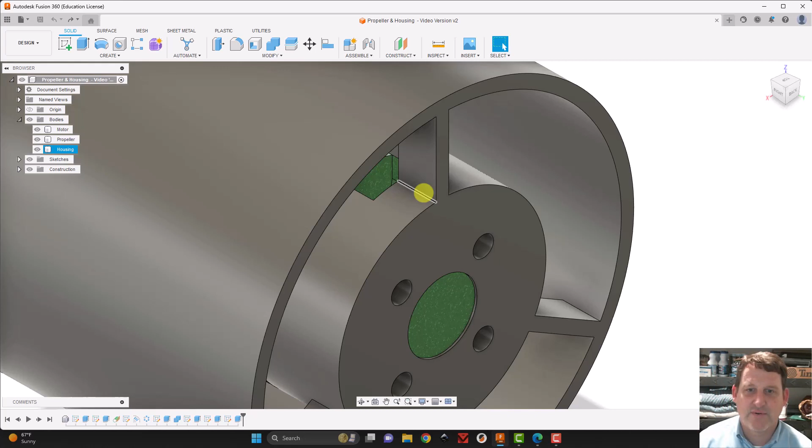We're also going to add a little foot to the top here so we can connect it to other things like a servo motor or the thruster test rig. So those are the three main things we want to accomplish. Let's get to it.

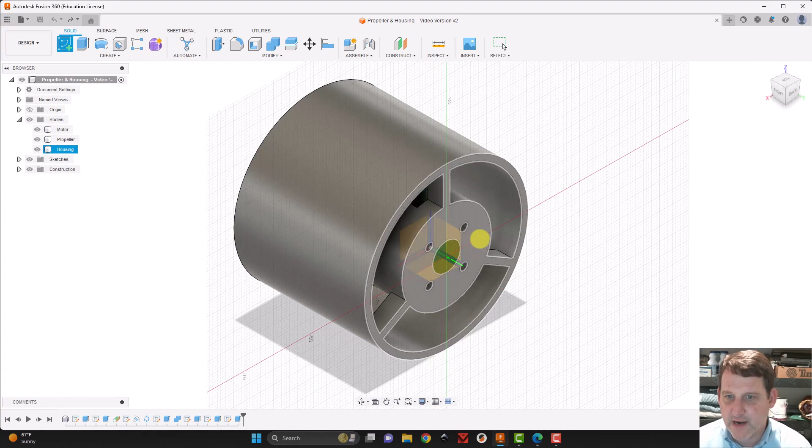I'm going to grab my new sketch and put it on the bottom. I want to avoid all these planes down here and put it right on the bottom of the actual mount or housing. Then I'll do C for circle and start the circle in the middle of one of these holes and go out to 6 millimeters. The head of these screws are 5.5 millimeters, so 6 will give them a little bit of clearance.

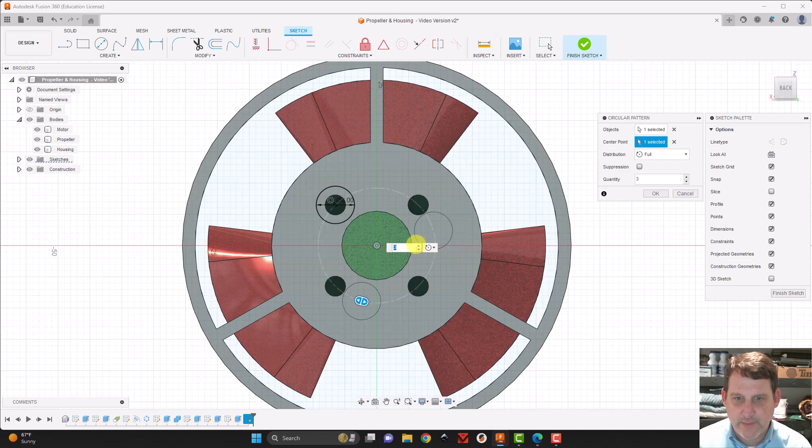I could just go ahead and make 3 more, but I'm going to do a circular pattern instead. I'm going to pattern this circle around the center of this main circle, and I want 4 of them. Click OK, and I'm extruding already.

So, E for extrude. I'm going to click on all 4 of these donuts that I want to cut out. I don't really know how far to cut. I want them to be about 2 millimeters from the inside surface, but I don't know how far that is.

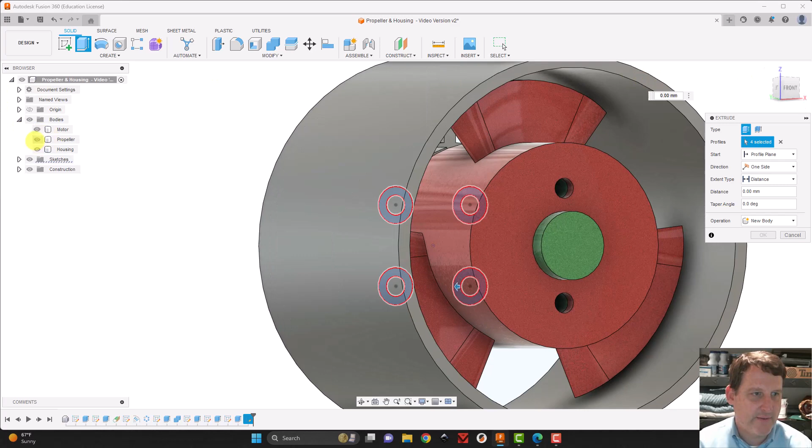So a neat trick you can do is turn off the motor and the propeller so I can see what I'm doing. I'm going to tell it instead to cut to an object, all the way through to this face. Then I'll switch the 'to object' setting back to distance, and it will show me how long that is. In this case, it was an easy 6 millimeters, but sometimes it's a really weird number.

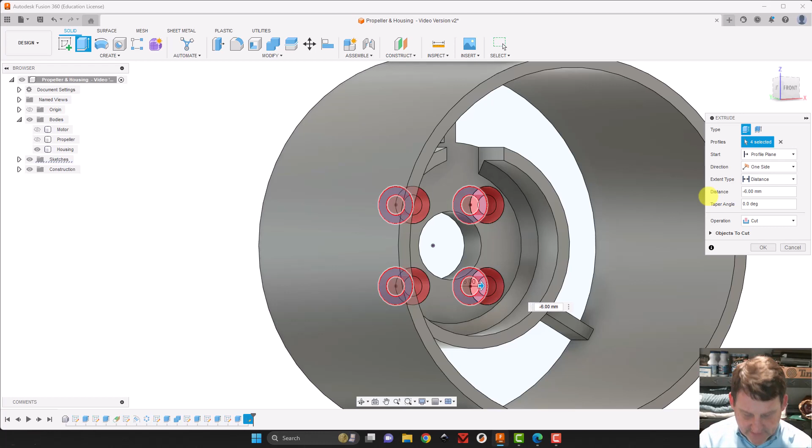Now I want it to be 2 millimeters short of this, so instead of 6, I'm going to type in 4, and say OK. You can see now we've cut recesses so the screw heads can go in, and the screw can embed really far before it grabs the motor. Awesome, so that's all done.

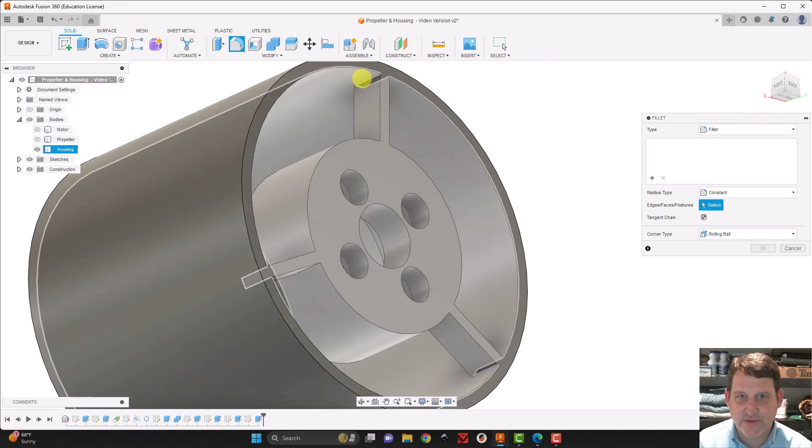Now we just need to round over all these hard edges. I'm going to grab the fillet tool and adjust it so I can see as many edges as possible. I see an edge up here and one down here. I'm going to flip it. I can see one here, and maybe this one too—yep, got that one too.

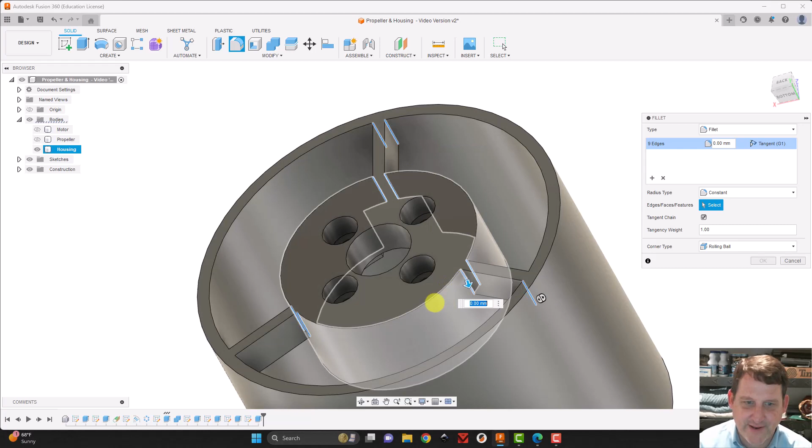I'm going to come over here. Okay, I can see this edge and this edge. I'm going to flip it. I think I can see all 3 of these edges—one here, and one here. So far I've got 9 edges. I'm missing these bottom ones—that one there, that one, and one more.

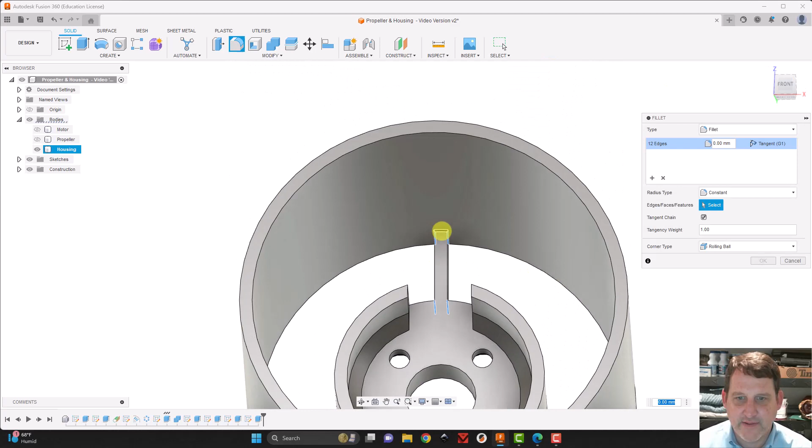That's 12. Now those are the main edges we want to hit for strength, but we're also going to flip it over, look at the front, and add these outside edges as well that hit the housing. If you get lost in your rotation, hit the home button and you can start rotating again cleanly. Sometimes the view cube gets in a weird space and I just can't use it well, so I hit home to get back. Then I'm going to zoom in here and get these inside flats as well.

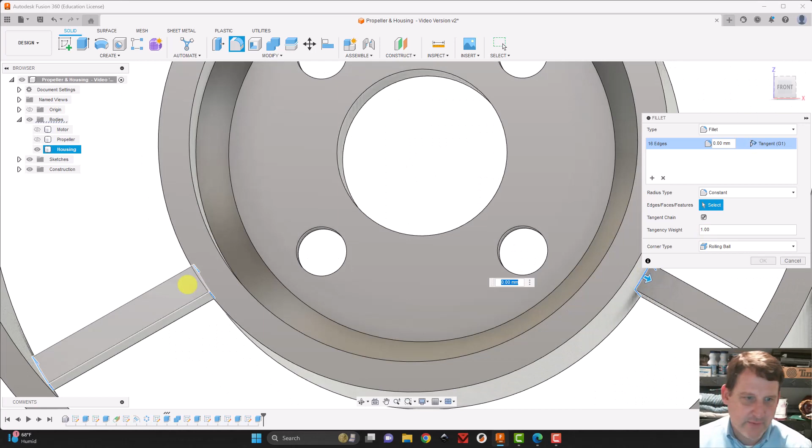When you're all said and done, you should have 17 edges. The reason you have 17 is you didn't need this one last 18th edge here, because it's a flat surface there. All right, now I'm going to give it, let's say, a 2 millimeter round over to see what it looks like.

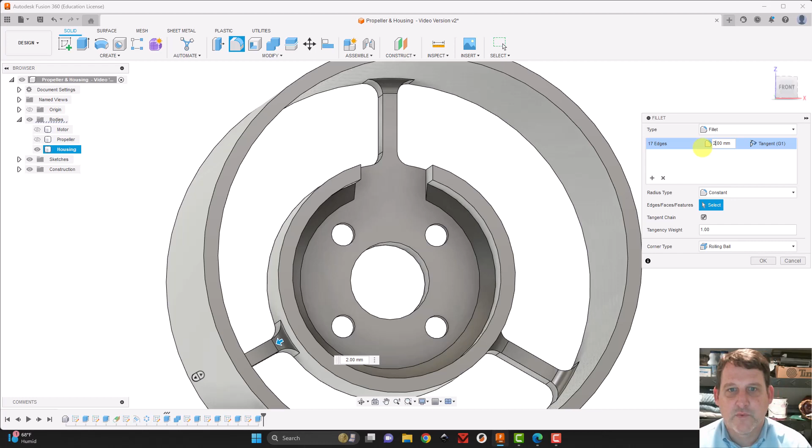Okay, that's a lot, so maybe we can do 1 instead. There we go, that looks great. 1 millimeter round over looks fantastic. Now you can see what we've done, we've got this really nice professional looking weld here in the corner. It's going to make it a lot stronger as we go about our things. Awesome, I'm going to do A for appearance.

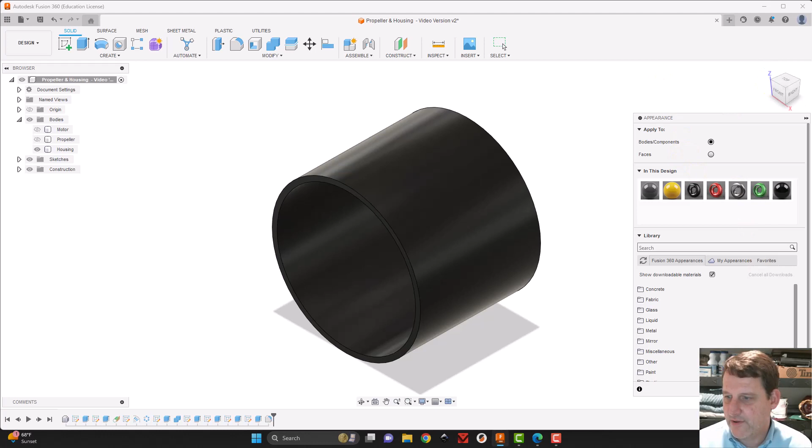I'm going to add some color because I like that. I'm going to grab this glossy black. Ooh, I like that, okay that looks good. And close this out, and then I'm going to turn the motor and the propeller back on. Everything looks fantastic.

Okay, so the last thing we want to do now is add that foot to the top of it. So I'm going to create a sketch real quick. I'm going to try and create a sketch, but I can't. There's no way to do a sketch on a round surface like this.

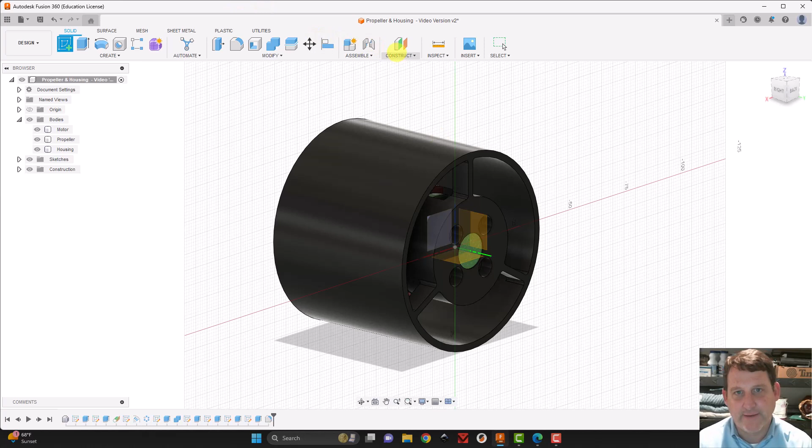So what we need to do first is create something flat that we can put the sketch on. And when we need something flat, we use what's called a construction plane. So I'm going to come up here to my construction plane. There's lots of different kinds of construction planes. The one we want is called a tangent plane. What tangent means is that there's something like a line or some object that barely touches the outside of a curve.

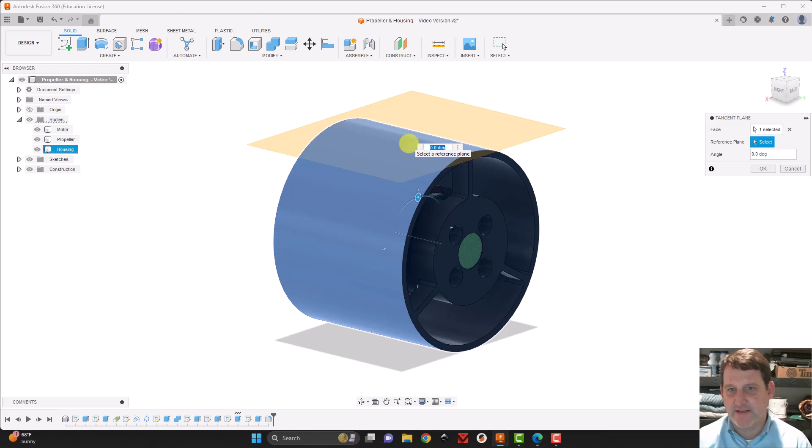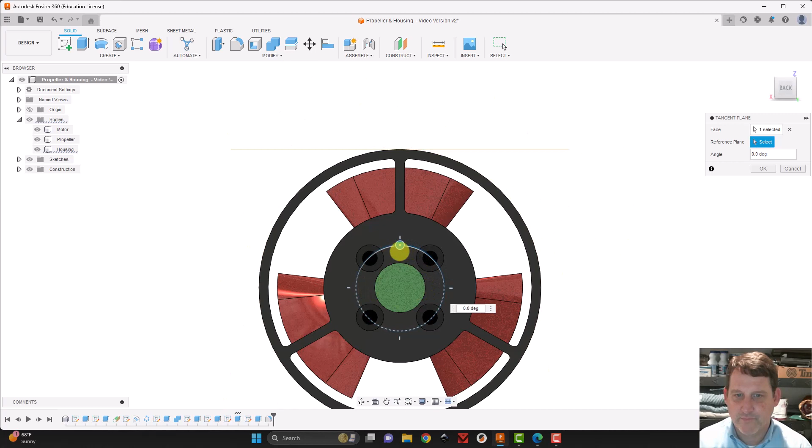So it's going to ask me what face I want to be tangent to, and I'm going to go right here to this face. Click on that outside edge, and all of a sudden I can put it there. If I go from the back, you can see it creates a plane that just barely touches the top of the circle. Now if I wanted to, I could grab this circle, this little dial, and put it on any side I wanted to. But I'm going to leave it here right at the top and say okay. Now I've got something flat I can put my sketch on.

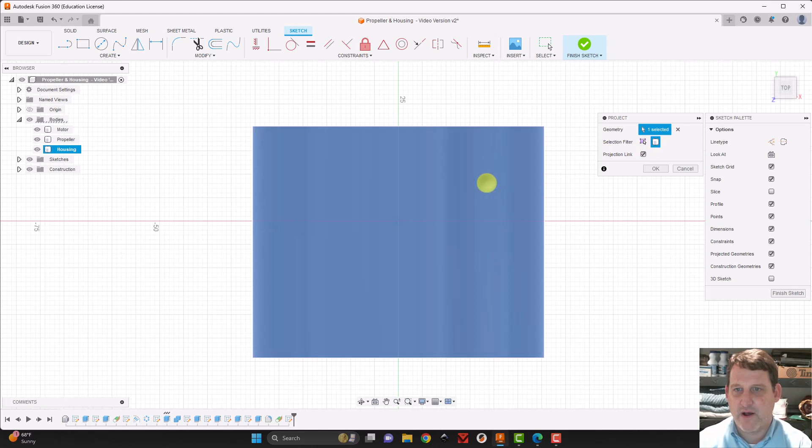So I'm going to grab my sketch and put it right on top here. All right, I'm going to project the shape of my overall body. So I want to be away from just the entities, and I want the entire body. I'm going to click on the housing and say okay. And now I can hide everything, and that's the shape of my housing.

Next thing I want to do is create a 45 millimeter circle somewhere in the middle. I do not want to place it somewhere special, like locked in the middle—I want it to be where I can move it all around like this. I'm just going to drag it in here inside somewhere. And I'm going to use the tangent tool.

Well, actually, before I do that, let's create a point. We're going to need to know where this center point is. So I'm going to scrape across this top purple line until I see that triangle, meaning midpoint, and click to add a dot there. I'm going to take my circle and make it coincident, so I'm going to grab the coincident tool and make the circle coincident. What that means is the two of them touch each other.

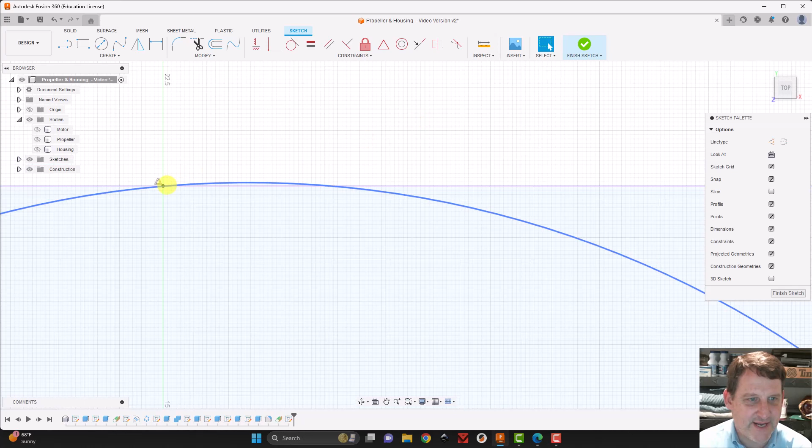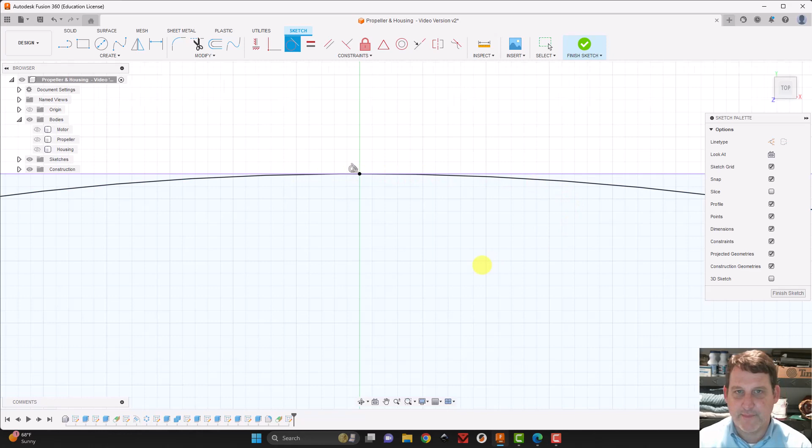Now, if you notice, it's hard to see how it touches this dot, but it also goes above this purple line. We don't want that. So we need one more constraint to get it to work just right, and that is a tangent tool. I'm going to grab the tangent tool, click on the circle, click on the top line, and now the circle doesn't pass through the purple line—it just comes up and barely touches it right there, then curves away from it. That's what tangent means. Awesome, and at this point the circle should be black instead of blue, meaning it's fully constrained and in place.

Next thing I want to do is just grab a line. I'm going to drag it from the circle to this top purple one. It doesn't matter where I start on the circle because I'm going to fix that in just a second, but I do want to keep moving around until I see that right angle 90-degree square show up, so I know I'm perpendicular. If you've done it right, you'll get these two T symbols, which means it's perpendicular. This blue line's perpendicular, 90 degrees to the purple line.

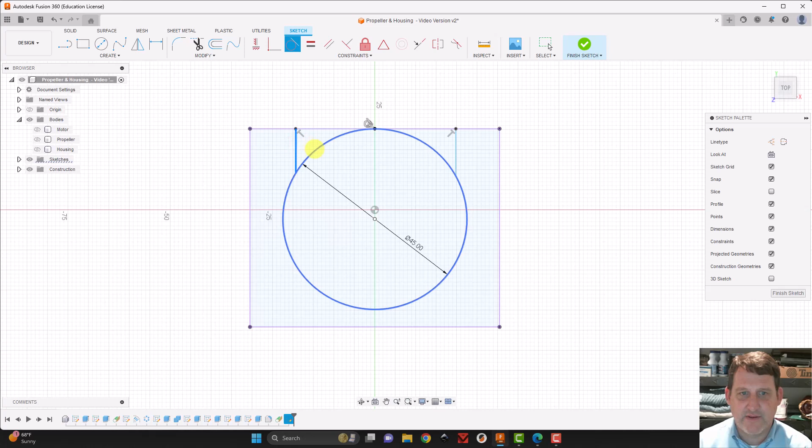All right, now what I want to do is have these lines come off really cleanly and smooth. Like they come down here and there's a kink right here. So again, I'm going to use tangent—click on this line and then the circle. That's going to force it to be tangent, so now it comes perfectly smooth off this circle. Same thing on this side.

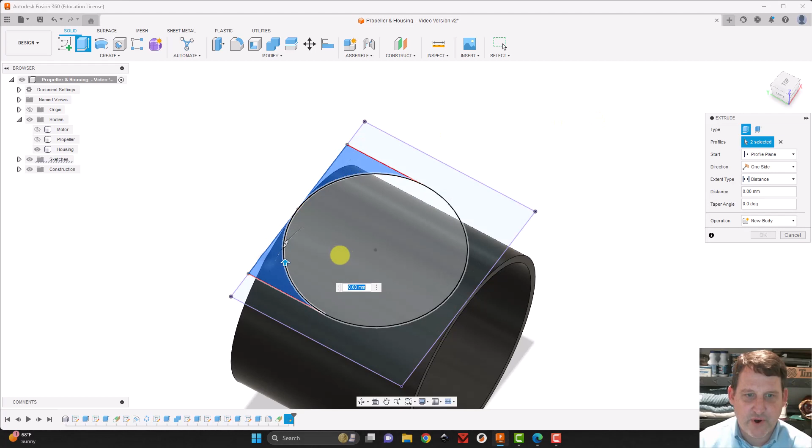All right, now I'm going to turn the housing back on, and I'm going to extrude this. E for extrude. I'm going to choose all of these pieces. This is going to be that foot that we're going to be able to screw into and attach the servo motor or whatever we want to it.

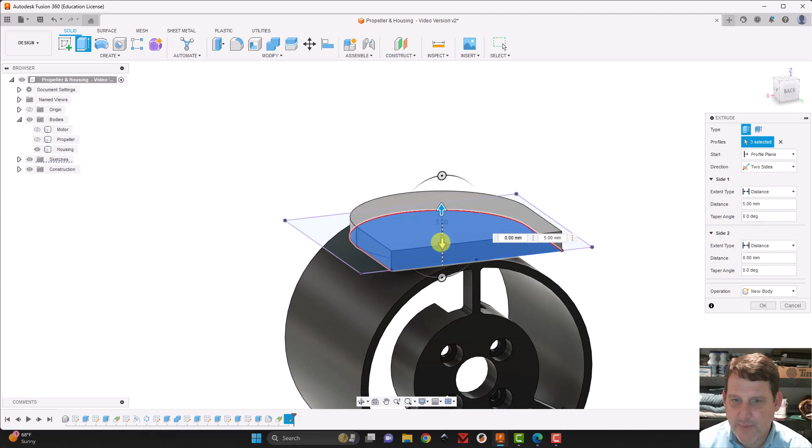I'm going to actually do a two-sided extrusion. I'm going to flip it over, and on the top half of the extrusion, this half, I'm going to bring it up 5 millimeters. And then on the bottom half of the extrusion, I'm going to say to object, and then click on the outside surface of the housing.

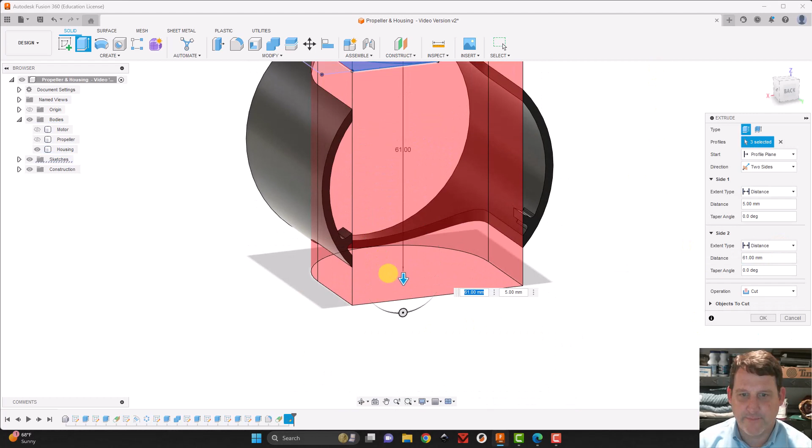What that does is it projects it down, extrudes it down in a wrapping way to barely touch that whole housing. If instead I were just to try to grab it and pull it through a distance, oof, that's a nightmare. I would have to go through a cut here. If I were to just try and pull it down to where this corner matches, you can see what it's doing is it's actually extruding into the whole thing. I don't want to do that.

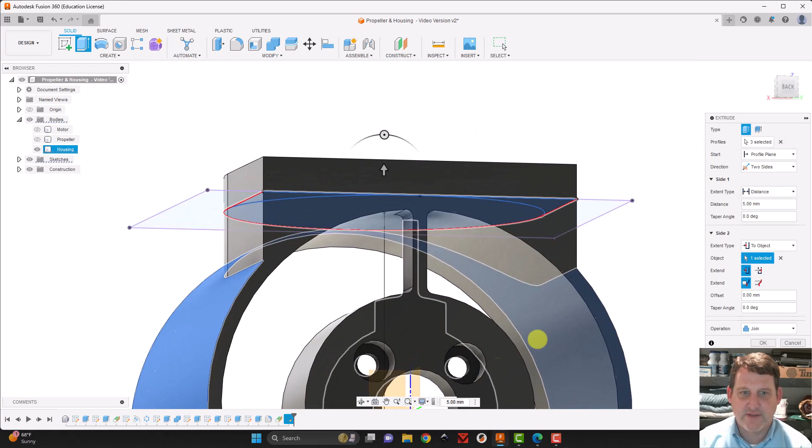I want to do it to object and then just click on this object. And now it extrudes just beautifully. You can see how it just beautifully extrudes to the right shape to get there. And then I'm going to click OK. Now I've got my little foot that I can put on stuff.

Awesome. Next thing I want to do is I want to cut. Well, let's hold off on that actually because I'm not sure how big the hole, where the hole should be placed for the... oh, I guess it doesn't matter. We can put them wherever we want. So I'm going to create a sketch on the foot.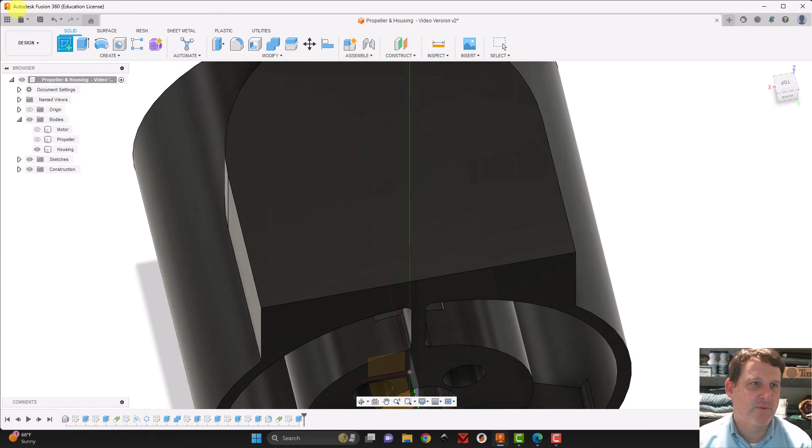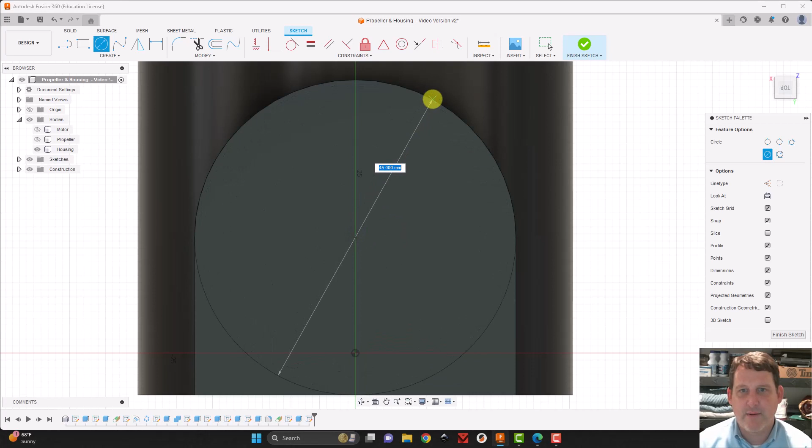We're going to cut some screw holes in here so we can screw on something like a servo motor. First thing I'm going to do is come here to the center, find the center of my circle. There it is, I see that little circle symbol there. That means I'm in the center point of a circle. I'm going to come up here and see, okay, that's 45. I'm going to back it down to maybe 35. And I'm going to switch it over to being a construction line and hit enter.

Next thing I'm going to do is put a circle. I want a real circle, so I'm going to turn my construction line off. Circle here of 1.2 millimeters. This is just big enough for the screw to go in, but the threads still hit it and dig into the plastic a little bit.

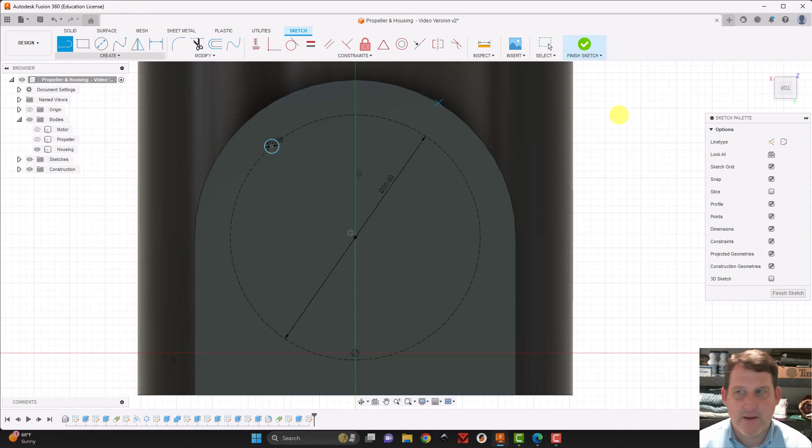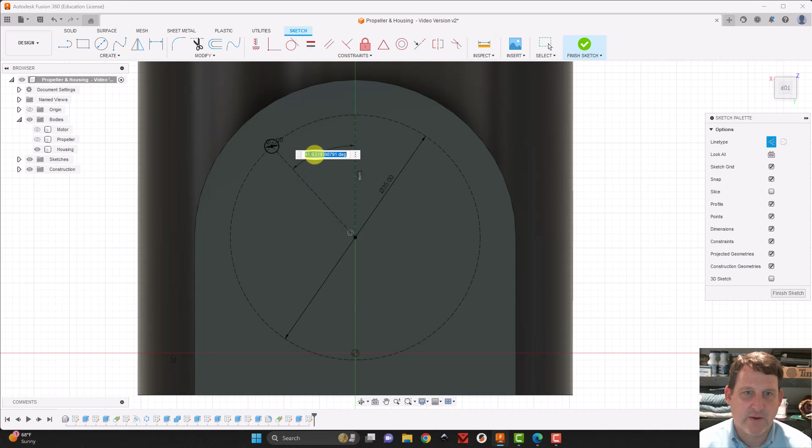And then I'm going to come here. I want to angle this just right. So I'm going to create a construction line from the center of the little circle to the center of the big circle, and then straight up to the top of the circle. Now I've got this little pie shape here, and I want this at a 45-degree angle. So I'm going to use D for dimensioning. Click on the vertical line, click on the line leading to the circle, and click one more time to place the measurement, then type in 45 and hit enter.

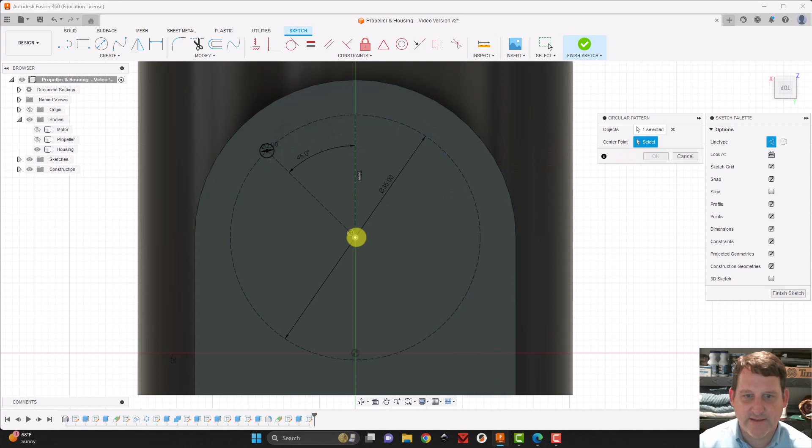And now I can create a circular pattern of these. I need 4 of these screw holes. So I'm going to do this by create circular pattern. Whoops, not that, uncheck that one, just that one. The center point is the center of this circle, and I want 4 of them. I'm going to click OK.

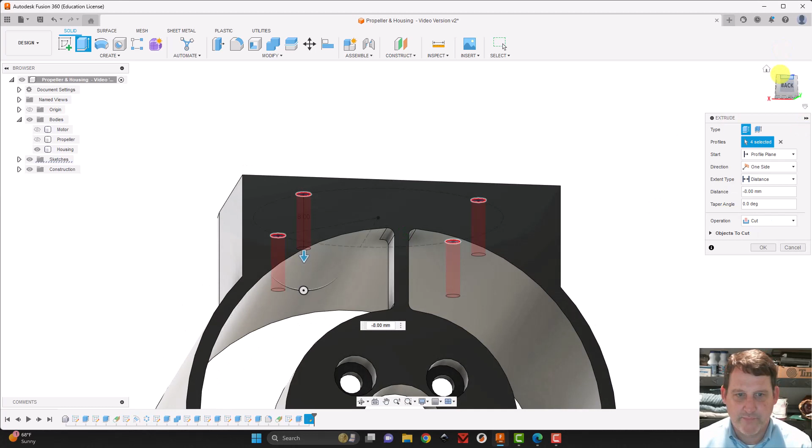And right away I'm going to E for extrude, and I'm going to extrude all 4 of these. I'm going to extrude them almost to the point where they pop out the other side, which for me ends up being about 9 millimeters. I'm going to click OK. All right, so now I've got little screw holes there. The screws will go in there and just seat really nicely in there.

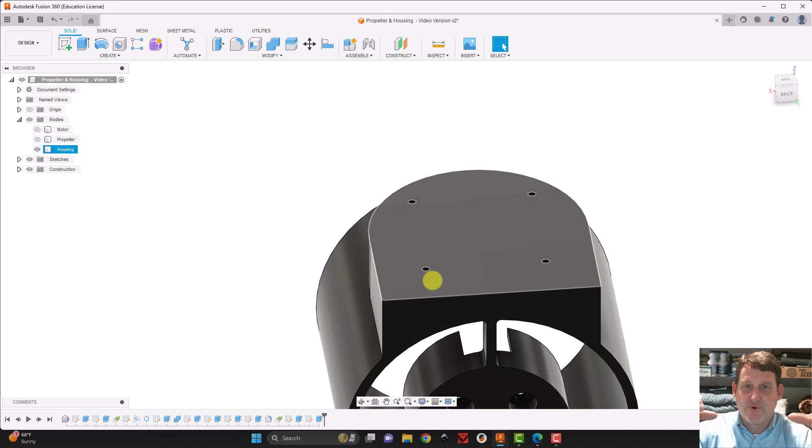Okay, so the next thing I want to do is, so that's for mounting to like the servo motor. We can create something that has screw holes at a 35 millimeter diameter. So super easy to do that. And now I need to have something where I can do a quick connect. Well, let's leave that there for now. We'll do one last connection here in the next video. Good job hanging there.